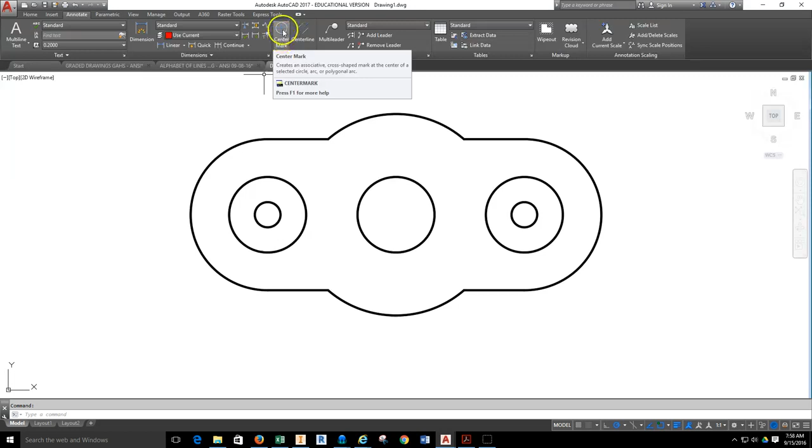This is that new tool in 2017. I'm going to go ahead and select it. The center mark is going to be based off the largest concentric circle. So that's the largest concentric circle for these three circles here. And then again here, and again here.

Now, for our standard, we are going to extend our extensions past the edge of the object by 0.25. An easy way to do this is to highlight all three center marks at the same time. Right-click, come down to Properties, and over here in the Properties you can see Geometry: left extension, right extension, top extension, bottom extension.

Type in 0.25 for the left extension, highlight it, do a Control-C, work your way down and paste with Control-V in the rest of those cells, and they all extend. If you need to adjust the cross size or gap size between the lines, you can do that here also. Once they're extended, I'll close out my properties, hit Escape, and now my center marks are unselected.

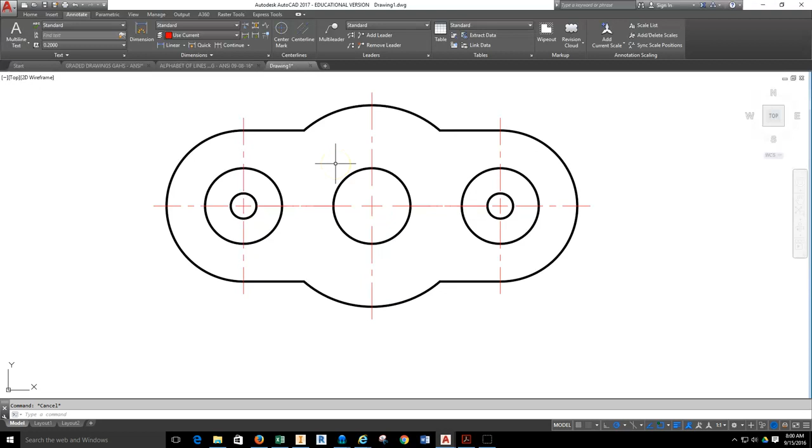Now I'm going to start talking about annotative dimensioning. First, you need to understand that dimensions are based off of a set of styles and standard styles. From the Annotate tab, come over to the dimension tool, and where it says Standard, pull that down. What you see here are the base standards for AutoCAD. One says Standard, and the other says Annotative. GAHS you would not have, nor Standard WS. When you pull down, you have Standard and Annotative.

With Standard, when you place a dimension, that dimension will not change in scale depending upon layout. It's going to be whatever you tell it to be. Annotative is the style that will change based upon the scale at which you lay the object out on a piece of paper. So make sure that Standard is selected, which should be your default.

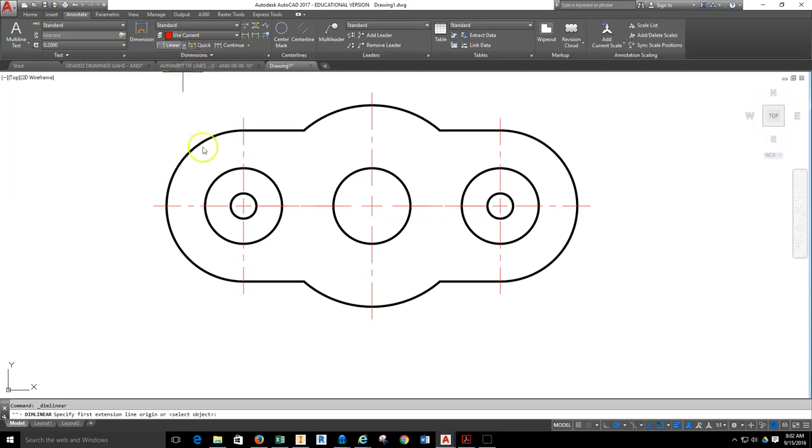Then pull down and select the linear tool, and dimension from the bottom extension center mark to the bottom extension center mark. Pull it down and drop it. This is going to be a standard dimension. Next, go up and change the style so that Annotative is selected, and do the same thing again, selecting the same point to same point.

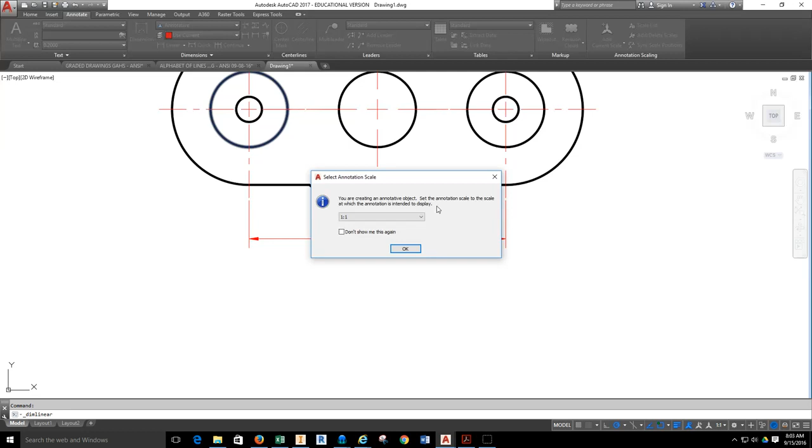What just came up for me is Select Annotation Scale: you are creating an annotative object; set the annotation scale to the scale at which the annotation is intended to display. This is important. It's asking whether you expect to lay this out on your title block at 1:1, or at a different scale. Right now, I'm going to assume 1:1 and say OK. If you think you'll change the scale, there's a small scale button down here, but we're not going to play with that.

So for now, I'm going to grab my linear tool, grab from point to point the exact same dimension I just placed, come down and drop it here.

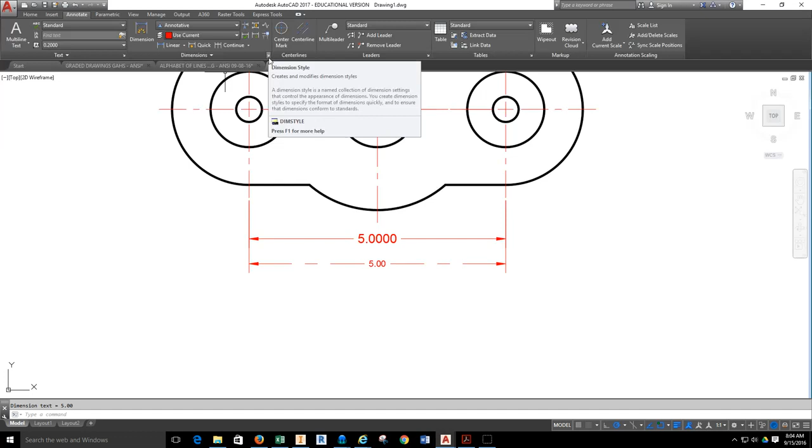What we're going to do next is we're going to get in and start adjusting the styles that drive these standard dimension styles. So to do that, there's a small little arrow down here in the bottom corner of this ribbon bar. See the little arrow? When I sit over it, it comes up with dimension style. Select that little arrow, and now you have the dimension style manager. Okay?

What I want you to do is first go to the one that says Standard. Select Standard over here in the window, and we're going to come over here and hit Modify. I'm going to click on Modify. Once I do that, I have all my tabs that I can go in and adjust my dimensions. Now once we do this once, we're probably never going to have to go back in and adjust it, but I want you to know how to do it. Okay? So we have lines, we have symbols, there's text, there's fit.

What I want you to do is be on the Text tab. And on the Text tab, you're going to come down to where it says Text Height. The text height in default is 0.18. Highlight that and change it to be 0.125. Then, after you do that, go over to the Primary Units tab, and where it says Precision, and you have 4 decimal places, go ahead and make it 2 decimal places.

And once you hit that button, I want you to take note of what happens in this window. This is a little preview window of what it's going to look like after it's applied. AutoCAD's giving you this preview just so you have a better idea. Okay? So once that's done, we've set those 2 things. I want you to come down here and hit OK.

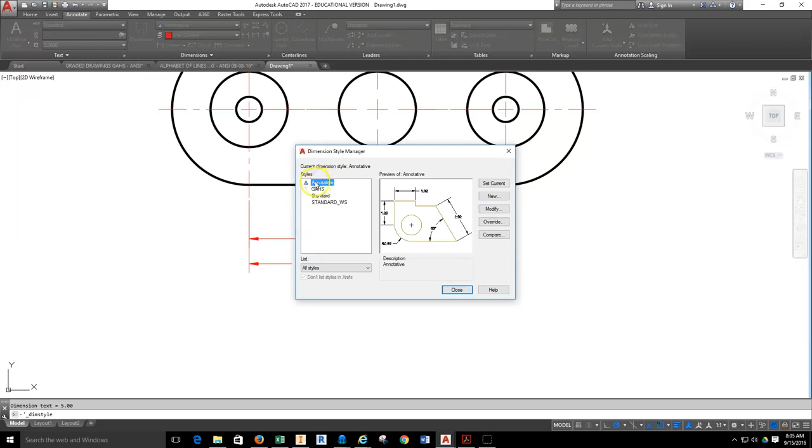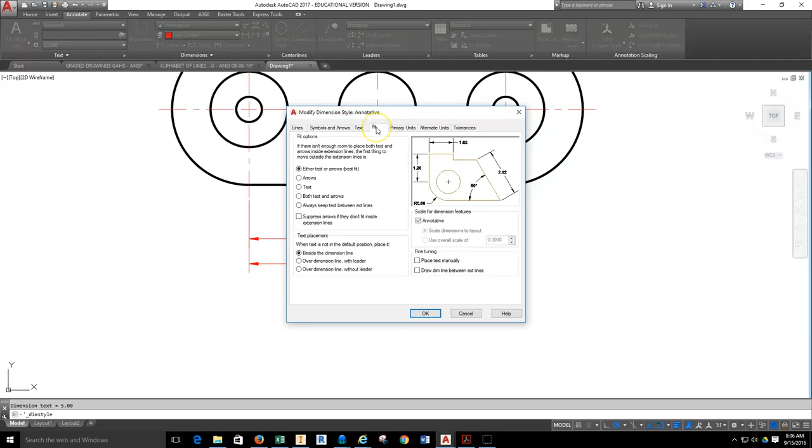Then you can come up to here, and we're going to play with the annotative. So we're going to go up to the annotative style, select that, slide over and hit Modify. And we're going to do the same thing. Go into Text, make sure your text height is 0.125. Then go to Primary Units, make sure your precision is 2 decimal places. Okay? And then after you do that, come down and hit OK, and then you can hit Close. And those 2 dimensions should be identical at this point. Okay?

Alright. This is where we get into the magic. I want you to go to a Layout tab, and I want to make sure that you can place this onto it. It doesn't have to be a title block. All it has to be is a viewport. And I want you to be able to scale this drawing so that it is scaled 1:1. And watch what I'm doing here.

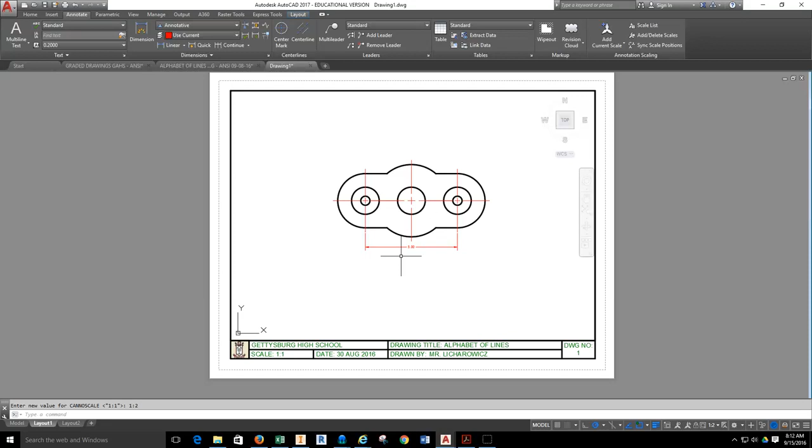When I actually scale this 1:1, I'm going to have a second dimension pop up. That second dimension pops up because it will only be shown when I'm at scale 1:1, because when I placed it as an annotative dimension, it is based in a 1:1 dimension scale. When I leave 1:1 or go to another scale, it disappears, because it will no longer be the proper size. So if I go to 1:1, it shows up.

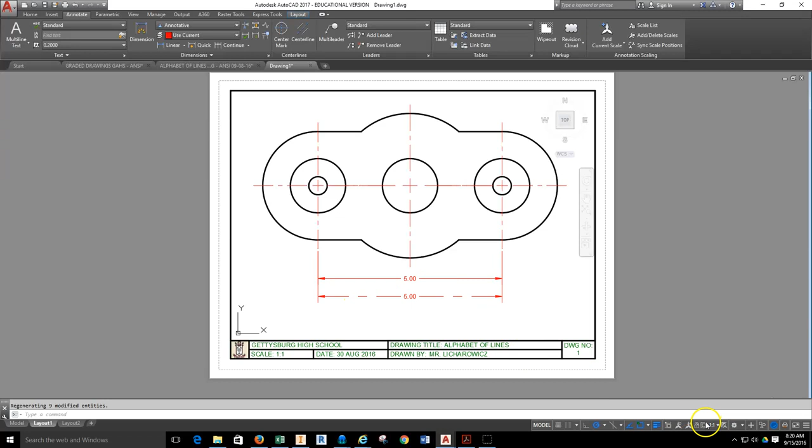Okay, model space. When you mouse over a dimension, don't click on it. Do you see that little scale symbol pop up? If I mouse over this one, there's no scale symbol. If I mouse over this one, there's a scale symbol. Why is there a scale symbol over this one and not this one? This is annotative. This is not. When I lay this out, again, I go to my layout. At 1:1, they both show up. When I take this to another scale, 1:2, the bottom one will disappear.

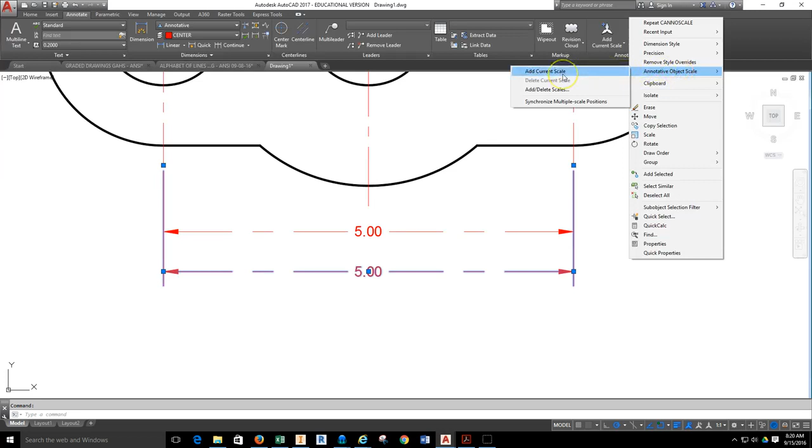If we want the bottom one to show up at 1:2, what we need to do is in model space, we select the annotative dimension, we right click, and we go up to where it says Annotative Object Scale. Slide over to where it says Add/Delete Scales. Select that. Here we're going to add 1:2 because I think I'm going to need to lay out my drawing at 1:2 to fit on my sheet. And then I'm going to take 1:1 and delete 1:1, and I'm going to hit OK.

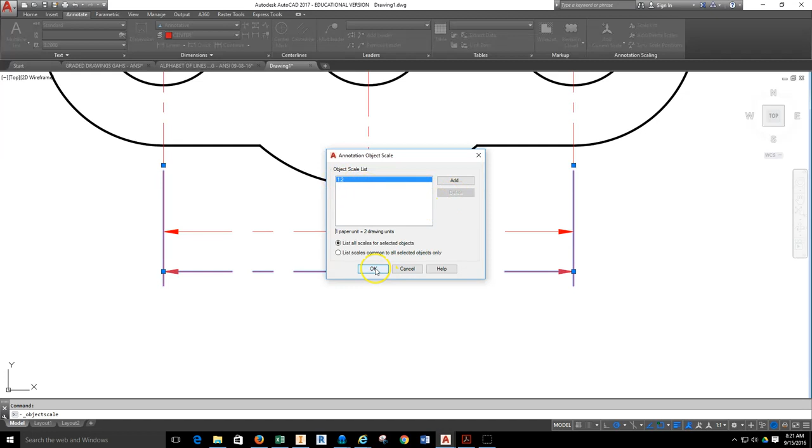Then I'm going to come back and go to my layout. And now at 1:2 I see my dimension. If I take this to 1:1, the dimension disappears because it's not set to 1:1. It's set to 1:2.